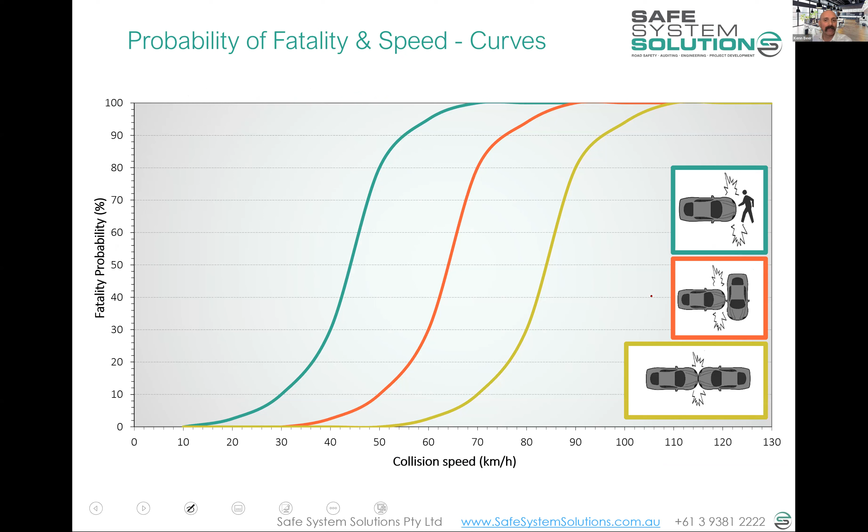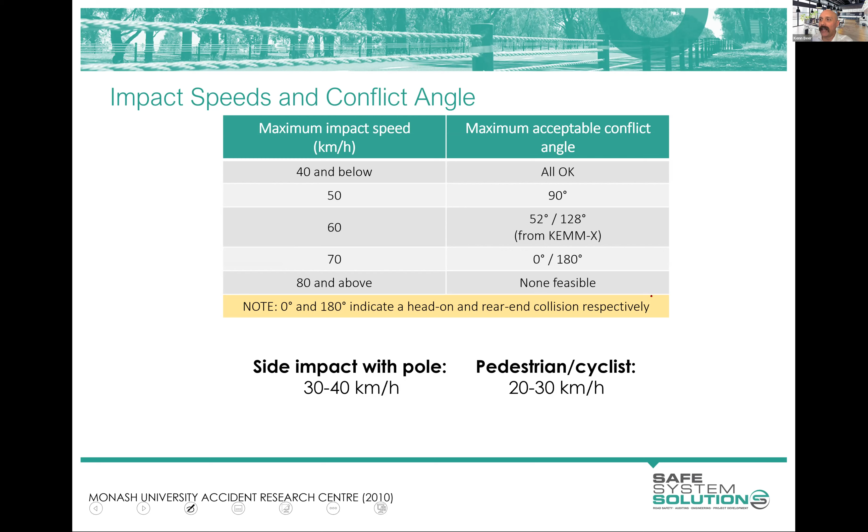In terms of severity, people generally understand speed, angle, vulnerability, and those sorts of things being the big factors. We delved into a bit of the science behind that with some graphs and different crash types, analyzing different speeds and angles, different crash types, and different road users involved.

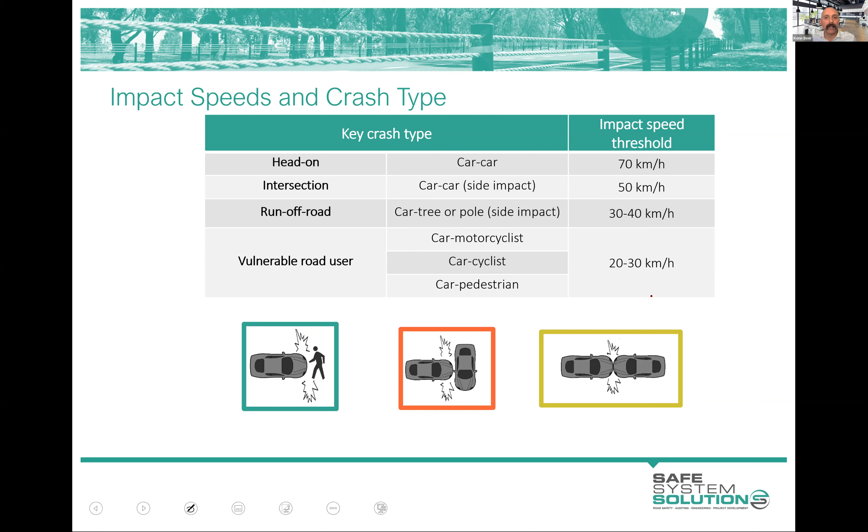We got all of that to the point where we provided that colored chart, and we'll be using the colored chart - I don't have a slide of it here, I've got one later on that we'll look to. But these are the building blocks you're going to need, plus a whole lot of your existing knowledge, whether you're a road safety auditor, involved in traffic engineering or road design, or a bit more on the periphery - you'll be utilizing existing knowledge to supplement your ability to do these assessments.

All right, but how do we do these assessments is the question. And I thought we might chuck up a poll, Kathy - it's not one to answer, but this is for me to just gauge where people are at in this course. So I don't know if there's polls there... oh, it is there, here we go. It's popped up: what has been your involvement with safe system assessments?

Nothing, safe system what now? I've heard the term but don't know much more. I've had one done on one of my projects. Done one. I live, breathe, and eat safe system assessments. So let's see where we're at as a group.

Okay, let's display that.

Most people here heard the term and not really much more. A few had them done on projects, so that's good - that's an indication of their mounting presence across Australia and New Zealand. A couple of people done them, been part of teams doing them, or living, breathing and eating safe system assessments. I love it, and a couple down the other end, a sort of skewed bell curve there. Beautiful, okay, that's good.

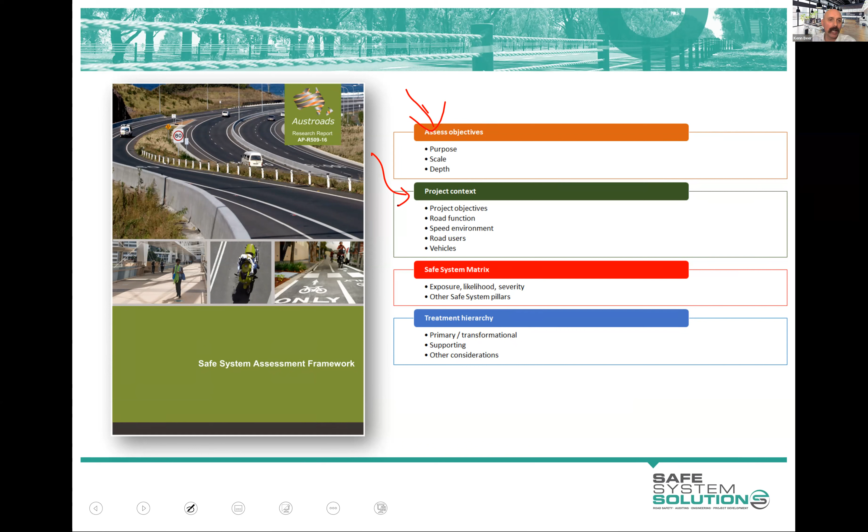Then we go into the project context and understanding what are the project objectives, what's the function of the road, the movement and place categorization, the speed environment, different road users, vehicles, all of that sort of stuff. Gathering that context helps us do the assessment, but also helps us make meaningful suggestions to the project team for improved alignment with safe system principles that understands why the project's happening, the objectives and the like.

Then we've got the matrix. This is the central part of most safe system assessments, and it deals with the exposure, the likelihood and the severity. And also we look at the other elements or pillars of the safe system, being the road users, the vehicles, and the post-crash care.

Then we make some suggestions - here's how you could improve your project in terms of alignment with safe system principles. And we start to categorize those into, are they going to be really big improvements in alignment with safe system principles, or is it more just helping out a little bit? I'm going to go through that shortly.

But what happened is around 2016, this was released. And before that, myself, a colleague, and a guy in Western Australia were really the only people doing these - what we were calling safe system audits at the time - trying to fill that gap. Now, ours was slightly different, but a lot of that was taken into this document.

This was pretty good, but really there were only a handful of these assessments done when this document was produced. So what happened was it went out there, and then people started using it more and more, doing these assessments, and lots of things were discovered that were not answered in this document - nobody had foreseen people coming up with these things to try and decide. One or two things were found to be not right, or not the best way to do it, in this document.

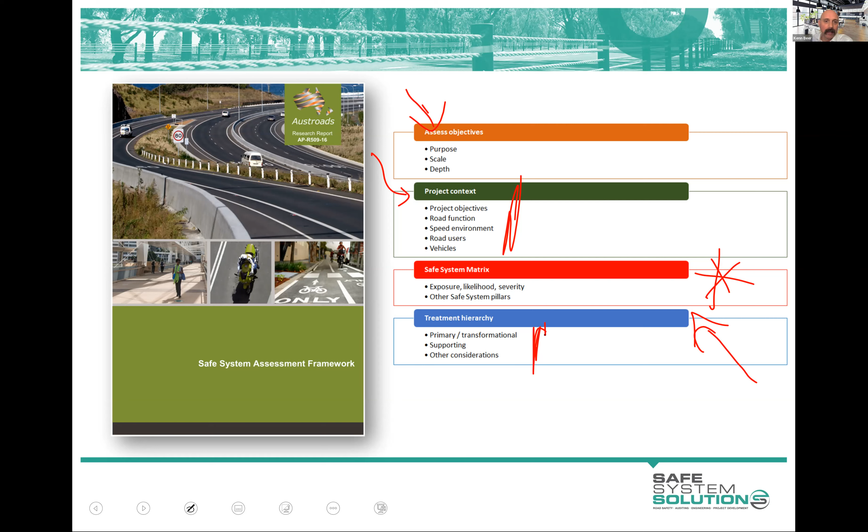But anyway, a couple of jurisdictions, Victoria and South Australia, produced their own guidelines which fill in gaps of things that were missing and clarify a few things and correct one or two things. Those are available publicly, and you'll find when you get past the front cover, these documents are the same - apart from a global replace of VicRoads with DPTI at the time, that's pretty much the difference. And that's fine, because we're seeing consistency across a few jurisdictions.

And what we're seeing now is that across industry, all across Australia and New Zealand, pretty much everybody is falling into line, utilising the Austroads guidance, and we've provided a few supplementary fact sheets for gaps that were still there even after these documents. This whole process is evolving and getting better, with people gaining a better understanding of it.

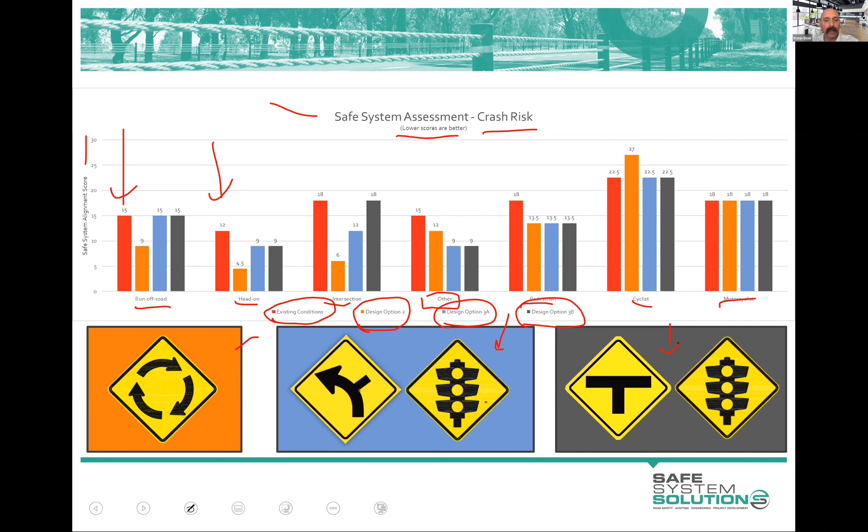We've got to ask, what is the context of this project? So you've been asked to do a safe system assessment. Maybe they've come to you and said, can you form a team of assessors and do the safe system assessment for our proposed upgrades to this intersection?

And you say, yep, sure, happy to help. We're going to need to understand a bit about your project and the context. And Austroads has provided these prompt questions in the Safe System Assessment Framework document. So you can use these. You could add more questions if you've got more that you want to build further context, but these are a pretty good starting point. What's the reason for the project?

And what are you trying to address here? Congestion easing, safety issues, speed compliance, freight efficiency. Why is this project happening? What's the function of the road, existing and in the future? Have you done a movement and place assessment? What's the movement and place categorization? All of this different thinking.

What's the flow of traffic, pedestrians? What's the current speed environment? What's the future speed environment? Have things recently changed? You're starting to think then, how well do these align with different safe system threshold speeds?

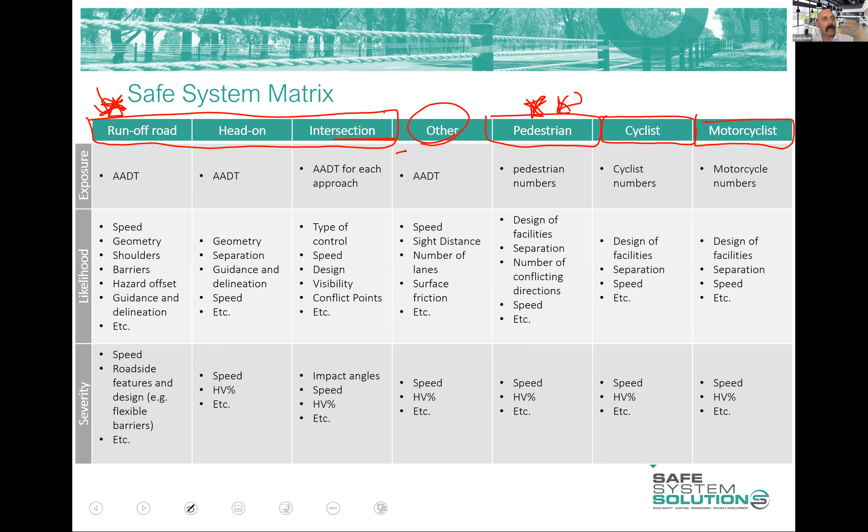So if you're worried about back of queue crashes or people doing a sudden stop at an intersection and rear ends in that sense, that actually has been decided to be categorized as an intersection crash. However, if the rear end is associated with a mid-block crossing point, school crossing, or pedestrian operated signals mid-block, or people emerging from driveways or these sorts of things, then you'd categorize it within the other category and you would make a little commentary around that there.

So those are the crash types.

And so then what you do is you look at these different rows, and what have we got? Severity, likelihood, and exposure. Okay, we're all very comfortable with that, and that's good. That's why we spent time on it. Let's make sure we understand this.

Okay, so exposure, you'll see here, these dot points are just some thought generators. AADT, AADT, and AADT for each approach. AADT being annual average daily traffic, the amount of cars and trucks going through this road section.

AADT has been put there for other, but it might be number of scooters. I suppose you could call that an AADT where the T, traffic, in that case would be scooters. But for pedestrian, we see pedestrian numbers, cyclist numbers, and motorcyclist numbers for motorcyclists, of course.

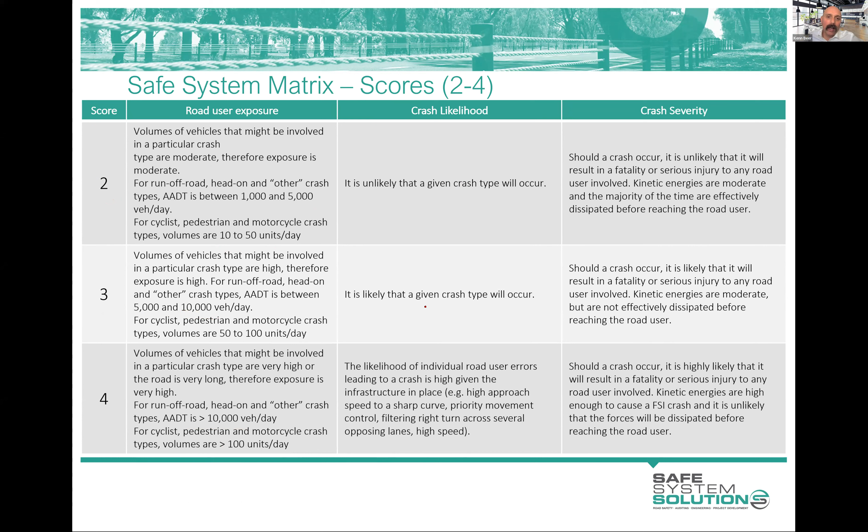If we go down to a 0, there is only minimal chance that a given crash type can occur for individual road user given the infrastructure in place, and the extreme behavior or substantial vehicle failure could lead to a crash. So this one, the whole likelihood scoring is subjective, and it relies on your understanding of what increases the likelihood of crashes.

Road safety auditors tend to be exceptional at this scoring category and really have good understanding, and those who have done lots of crash reduction studies or crash investigation studies or black spot studies really understand a few of those key characteristics. But the important thing to remember is this is a relative score, because if we took this as an absolute, we'd say highly unlikely across everything, because crashes are, in the scheme of things, highly unlikely. But we're talking about that relative to the other existing intersections or areas around your state or the like.

And we know that the 4 is really held for things we know have significant deficiencies, or are requiring high cognitive workload for the road users, or have really significant constraints in terms of sight lines, or really complex decision-making points and those sorts of things.

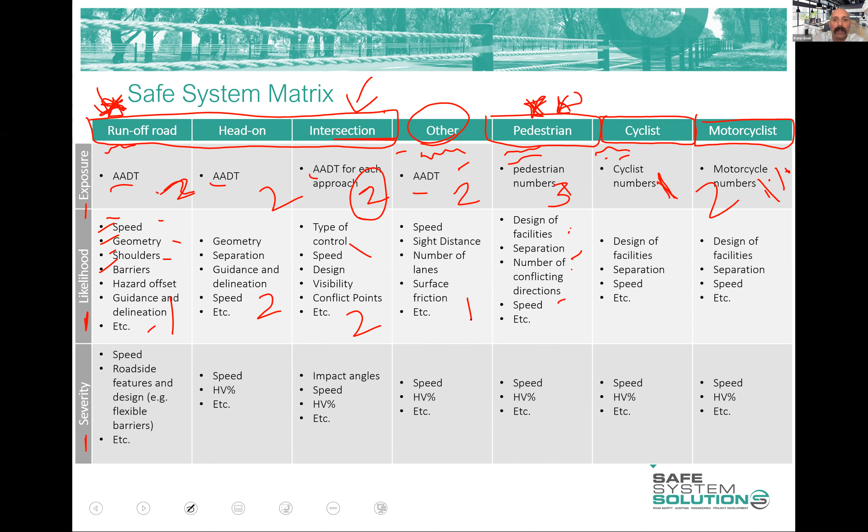So this may be, well, we'll put a 3 for pedestrians. So maybe it's got really good sight lines. It's got a pedestrian refuge. It's got good lighting at a point. It's well positioned on pedestrian desire line. Everything's looking good. You're really happy with it all. And you're happy to say, well, actually, I think, I'm only going to put 2 here.

And cyclists, you might say, well, there's no cycling facilities, there's no cycle lane, there's no alternate paths, in any area. Maybe part of the reason why our volumes are low, but forget about that because we've accounted for volume. And you're just going to say, well, actually, I'm going to say a 4 there because it's really, there's nothing, and it's inherently got issues if cyclists use it.

And then motorcyclists, well, you look through and you're thinking about motorcyclists at intersection, and they're smaller, so they're hidden, they're inherently unstable. Those are likelihood sort of factors you're putting in there, but you're not thinking about their vulnerability because that'll come in the severity, but it's just what's the chance that they're going to crash, and maybe you go a 3 for that in there. Okay.

Now, I'm going through this very quickly, obviously, and just sort of high level broad brushing it. You're going to actually need to do some justification in each of these when you get to that cell in the matrix. How did you arrive at that score?

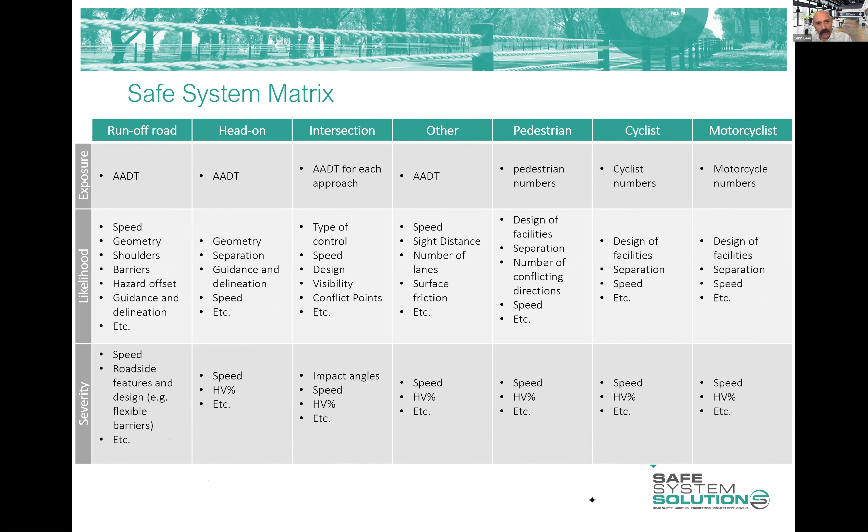Now I'm going to pause there, Kathy. I'm going to see if we've got any questions, and I'll talk to that a little bit, and then I'll do a worked example and show you some actual ones. Well, actually, after some questions, we'll probably take our stretch break and fill up our waters. Any questions at this stage, Kathy?

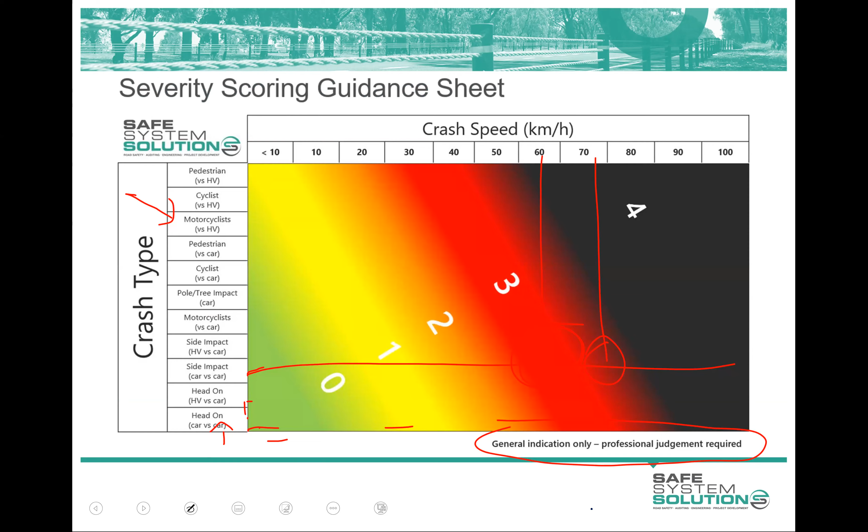No questions just yet, just corrections on your calculations. Oh, what did I stuff up? Just doing it quickly - 2 times 3 times 3 equals 18. Sorry, yep, good, well done. Prize to that person who can calculate better than me running through quick. Well done. Oh, there you go, easy fix.

Any other questions at this stage? I guess we're looking for questions on all of that. Or we might give everyone 5 minutes to have a stretch break and so on, and maybe think of some questions and type them in the meantime.

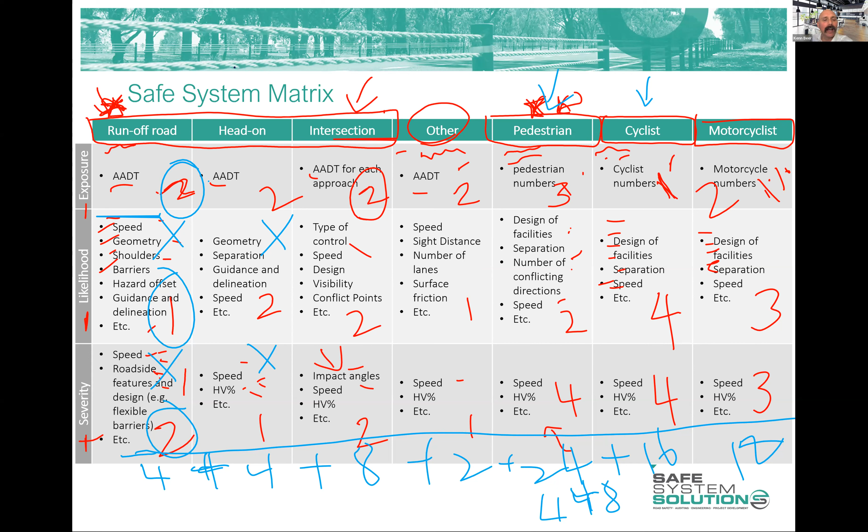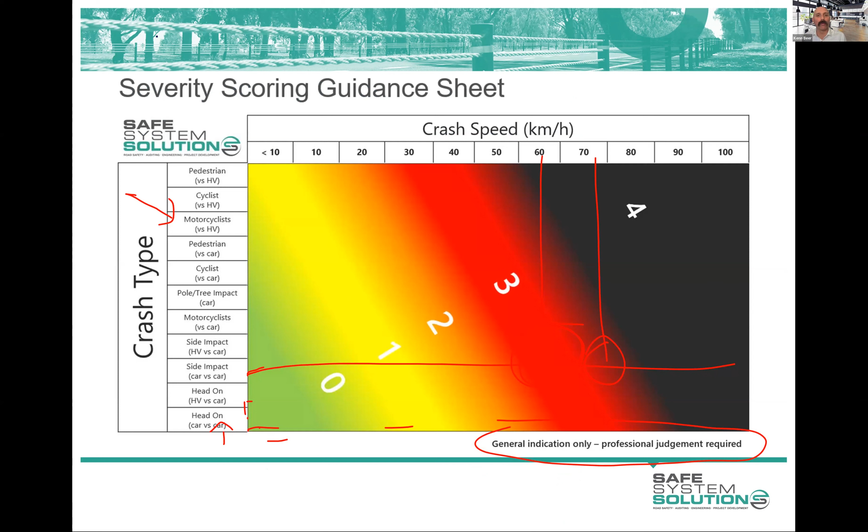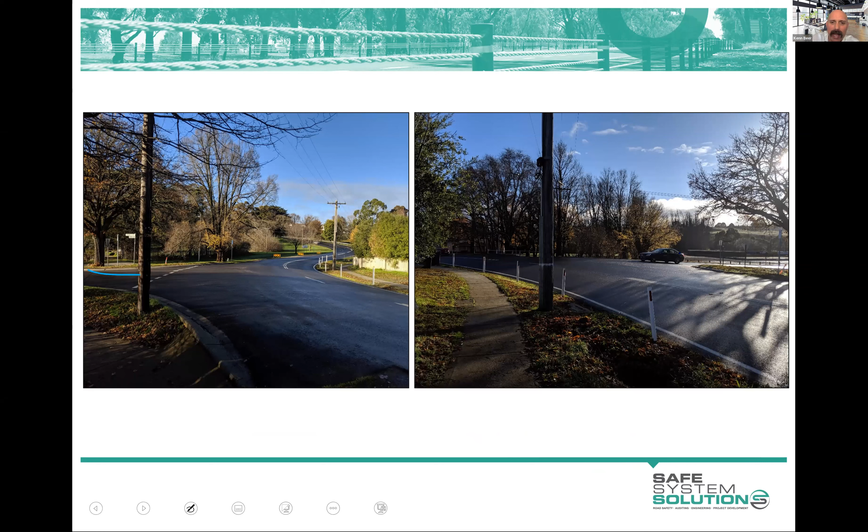Okay, so let's take another one and see it fleshed out a little bit more. Say we've got this intersection, for example, and you can see it's a priority controlled intersection, a give way intersection. You can see a vehicle coming out, got a bit of footpath, some guideposts, power poles, one lane in each direction, an approach to a town. But they're saying we want to upgrade this intersection, we've got some concerns about it, and the area is growing, so we've come up with 3 design options for this intersection upgrade.

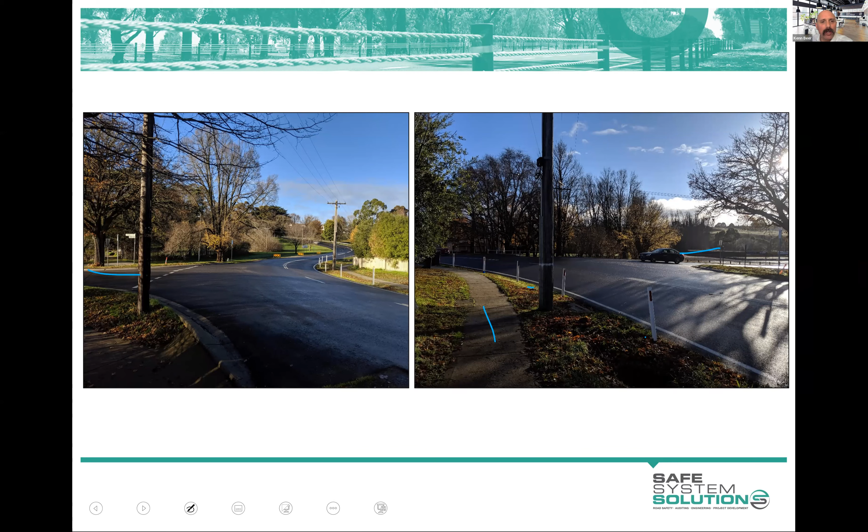Here's our first design option - one of the options could be a roundabout here, a single lane roundabout. The next option we've got is a signalized intersection - I'm going to signalize it and keep that curve there, we'll call it a modified T signalized intersection. Then our third option would be a conventional T intersection with some slip lanes.

So there are 3 options. What you do when you're handed all of this package - there's our 3 designs, that's the area, you've got some context and some information from them - is you go out and look at the existing conditions, gather your intel around that, and then fill out one of these matrices.

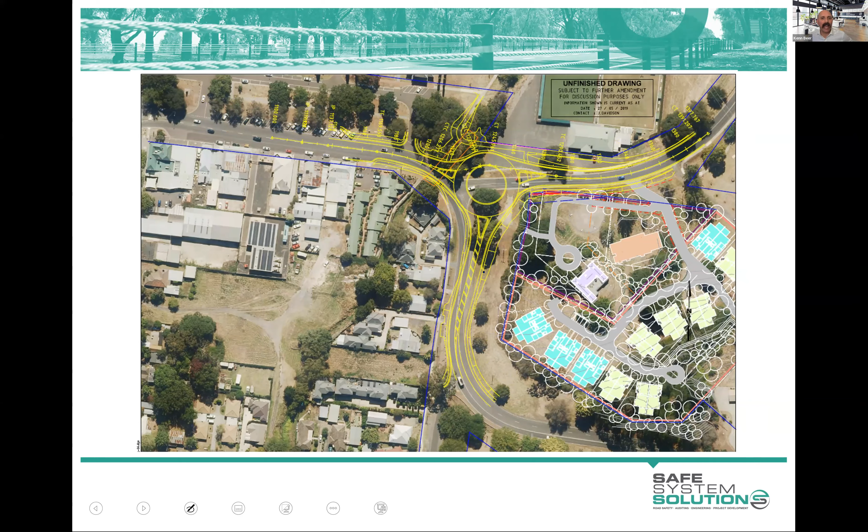And you do it for the existing condition. Okay, so what is there now? Put the designs away to the side. What are the existing conditions? How many vehicles are we talking about? What's the AADT on these roads? What's the intersection AADT?

Other pedestrian—don't worry if you can't read the words in this, I'm just using it as a demonstration. And then you pop your scores in there.

You'll see then when you go to do likelihood, you're putting there factors that increase the likelihood of crashes, and you dot point some of those out. Factors that decrease the likelihood, dot point a few of them out.

And then you put a score there. Now interestingly, that score has a 0.5. Now, 0.5 is discouraged, but it is acceptable under the different guidelines that we have.

Austroads made no commentary around the precision of the scoring, so they didn't make any comments really at all. As a result, people started to put some pretty precise numbers to this, and we saw people putting a likelihood of 2.73, something like that. Then you multiply that out and you get a number to 12 decimal places or something when you multiply it out. Given that we know this has got some subjectivity to it, it's really just a risk assessment methodology. That was kind of crazy.

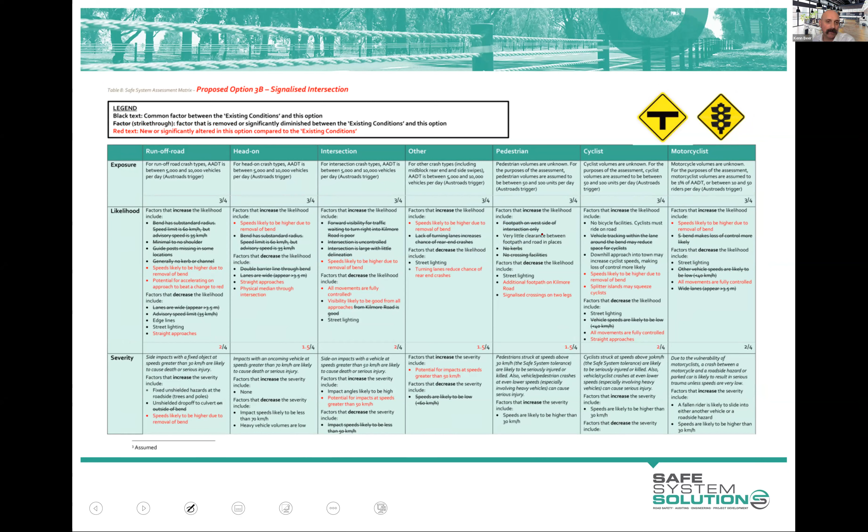What that does is give you an existing conditions matrix for each of the design options. You're then able to produce these overarching scores which say your baseline was 118.5. If you build the roundabout as designed, that brings it down to 90. If you do the modified signalized T intersection, 99. The T intersection, 105. What I see from that is any of your proposals improve alignment with safe system principles. The roundabout as it stands gives you the best alignment, but none of them are zero.

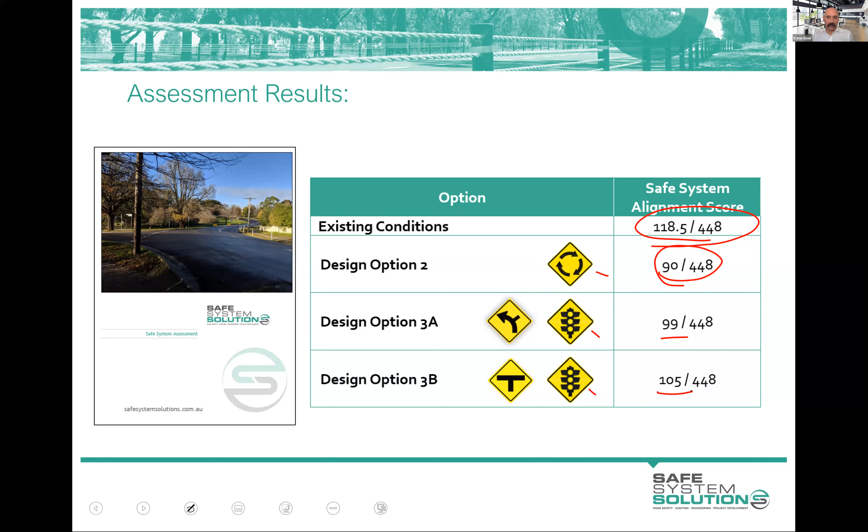So we can continue to work on these to discover what else we can do that's practical and achievable. You can get this next level of refinement, which we already saw, but it helps us drill into where we can do things.

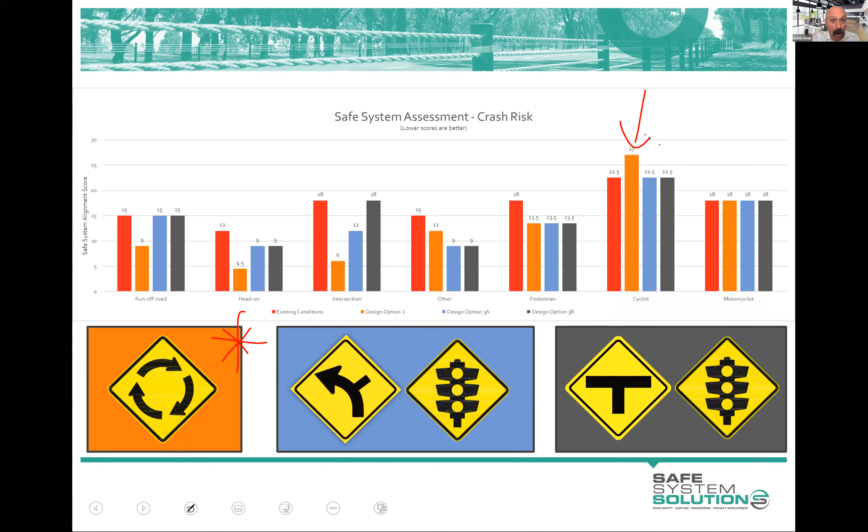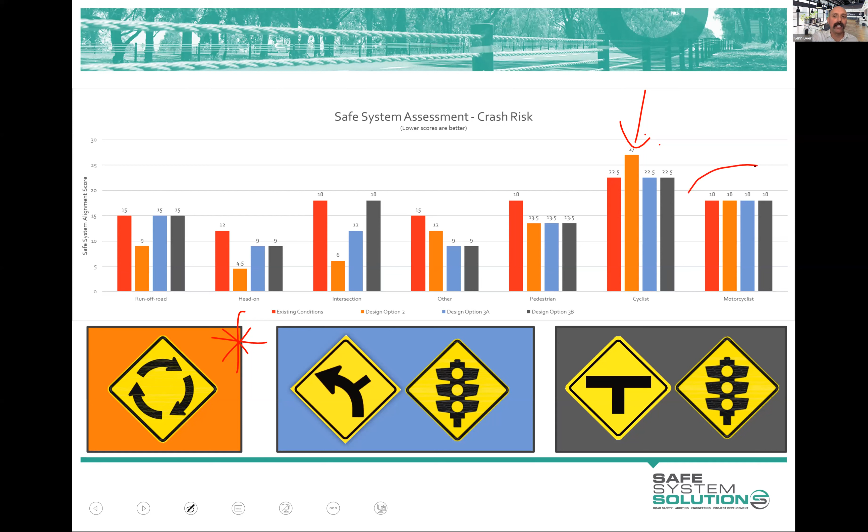So you make some recommendations. You might say, hey, the roundabout, while it came out on top, was actually not great for cyclists, who are coming out as the worst thing overall in alignment as an individual crash type. So we recommend you provide cyclist facilities on the outside, here's some ideas on how it could look. You might say motorcyclists are consistently scoring badly across the board - could you use motorcycle friendly signage, or other things?

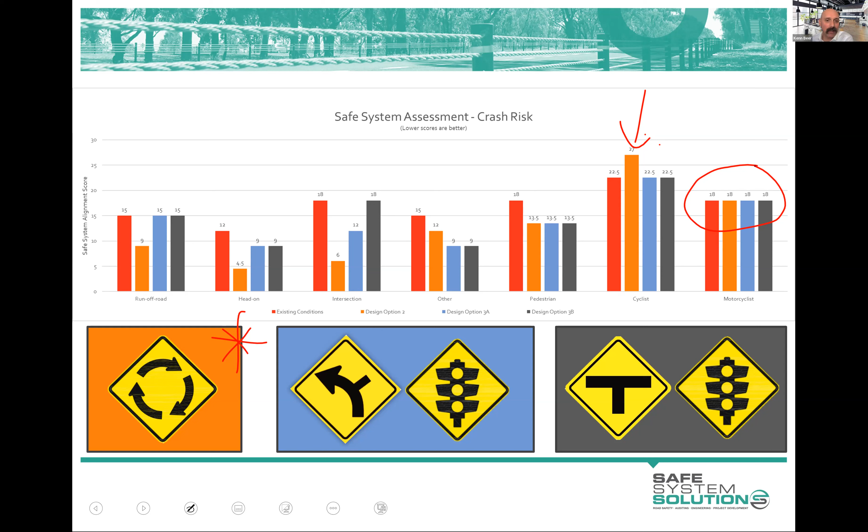So you're then able to make these suggestions to the project team. A safe system assessor has no regulatory power and can't demand changes - you're just providing advice, here's how you could improve those scores if you want to go down that path. And there's one little extra trick around the suggestions you make.

So you're saying, hey, if you're going to do that roundabout, here's some suggestions - let's do a separated bike facility around there. And we're going to say that that is a primary treatment, because we're categorizing it - is it primary or is it supporting?

Primary treatments are any road planning, design or management considerations that virtually eliminate the potential for fatal or serious injuries occurring in association with foreseeable crash types. So you're thinking about a particular crash type, and are we virtually eliminating the chance that it will result in death or serious injury? So not necessarily eliminating that crash type, but the chance it results in death or serious injury.

Supporting treatments are road planning design considerations that improve the overall level of safety associated with foreseeable crash types. So it does need to improve safety, but it's not expected to virtually eliminate the potential for fatal or serious injury for that crash type. A little note - it doesn't change the ability for a primary treatment to go in the future. Non-safe system is probably there just for terminology purposes - we don't tend to put things in that category because you're not making recommendations for non-safe system aligned treatments.

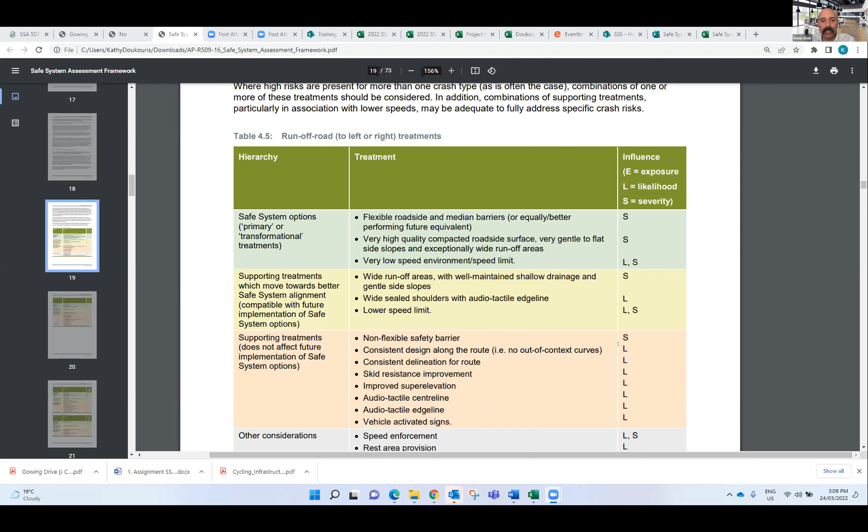So those are supporting treatments. We're seeing wide run-off areas, non-flexible barriers, so more rigid barrier systems, audio tactile and the like. We know these are going to reduce risk, but they're not going to virtually eliminate those crashes.

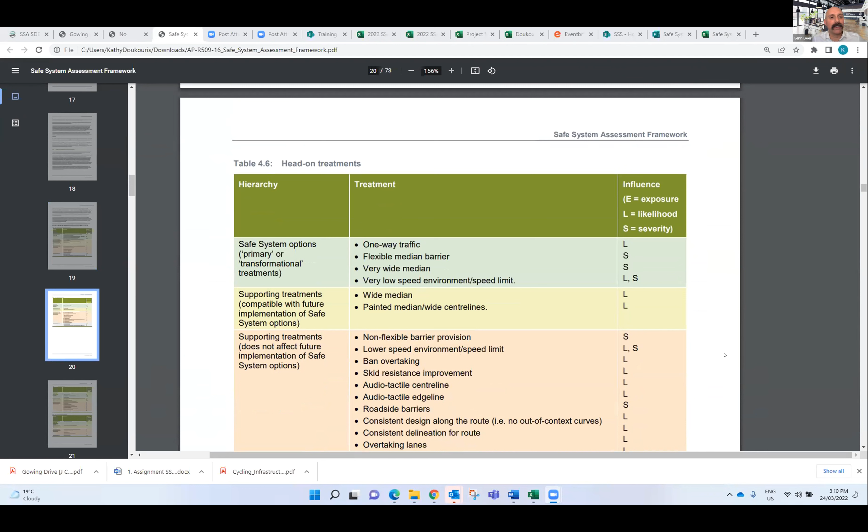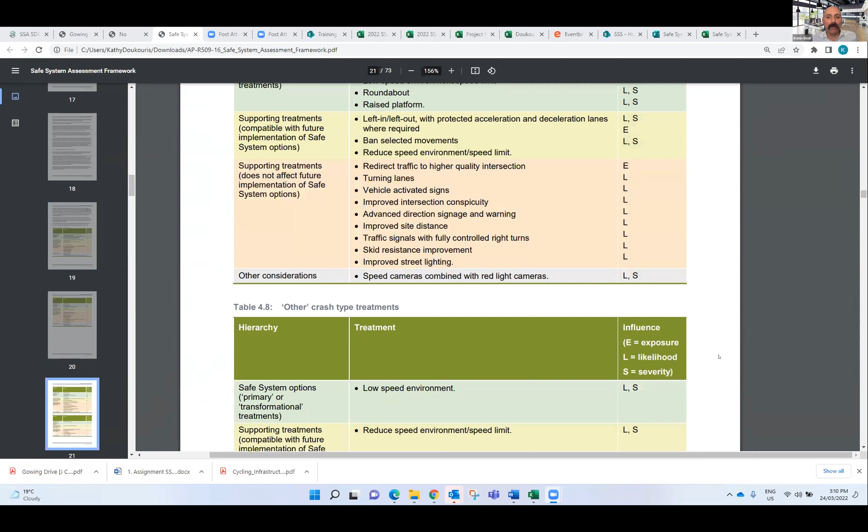And if you scroll down a bit into the next table, we see head-on treatments, and you see again lists of primary and supporting. You go down a bit more and we'll see the intersections pop out. So these are not all treatments possible. You'll come up with other things. You've got to make a judgment call based on the principles, but this is going to help and guide you, so you might want to be referring back to that as you think about it.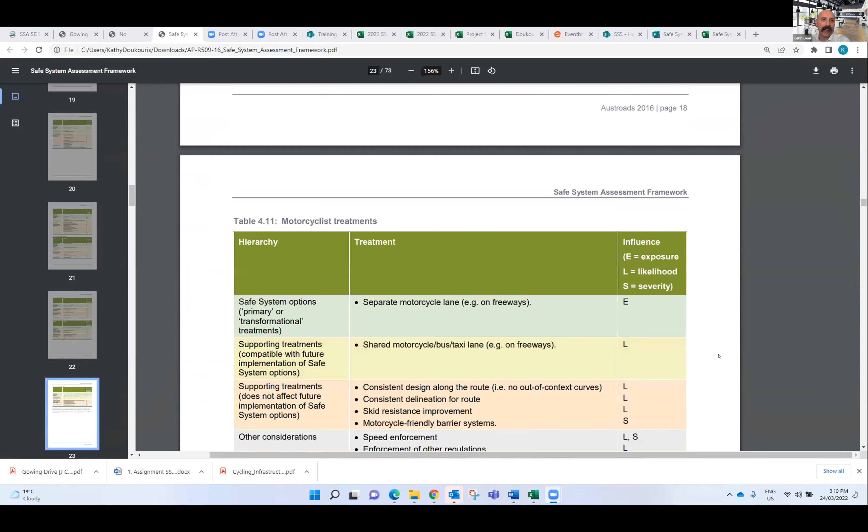Okay, thank you, Kathy.

So let's go back to my slides. So what you're going to do is look at the design that we give you, score the existing conditions of the area without that design built in your mind, and then you're going to imagine it built, and then score that. Then you're going to say, for this design, here are some improvements, and you're going to categorize every one of those suggested improvements into primary or supporting.

And we'll take you through a template to show you this that you'll be using. Any questions before I jump into this, Kathy?

Yeah, we have heard some comments come through. Has a high original score ever justified revisiting the business case?

High original score, so as in a high score in the design. Examples of where it has certainly made people revisit business cases and fundamentally change things is some of the ripping out of roundabouts and replacing with traffic signals, where the total score went up. So it was a case of putting that on top and reminding them that at a statewide and national perspective, we have committed to the implementation of the Safe System. What you're about to build goes the other way, and here are the scores to prove it. Yes, that certainly gets revisited and altered and changed and back to the start. Now the whole business case might have, in traditional senses, looked pretty good - increased efficiency, did this and that - but this has been helpful from that perspective.

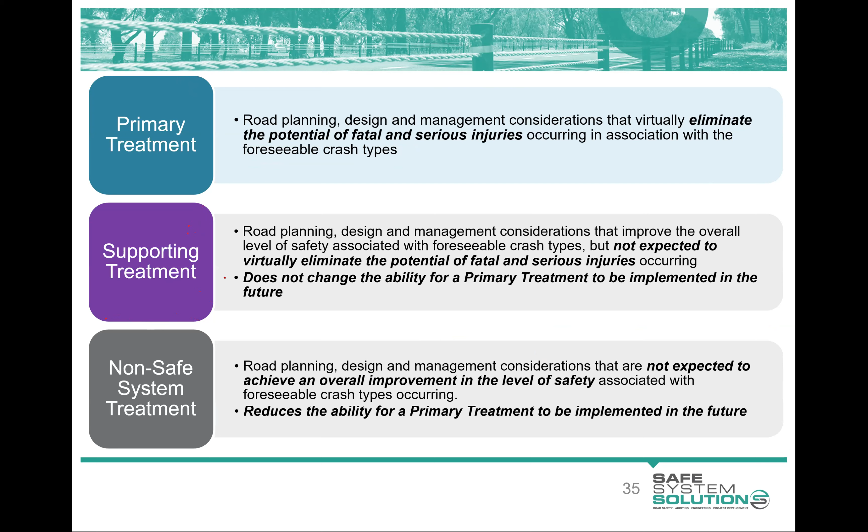That's all the questions for now. Okay, so we've done the matrices and we've got that good score, but there are these other questions that are asked in a full Safe System assessment, and they are qualitative.

They are not quantitative. We don't put numbers to these, we just put written answers. And this occurs in full safe system assessments. They're these questions to sort of prompt your thinking around other wider safe system elements. They may influence your scoring, or they may just bring up other ideas completely. But the questions are straight out of Austroads, and you've got to go through and write little bits and pieces and notes around these. So they're categorized into road user, vehicle, and post-crash care.

The first one there is, are road users likely to be alert and compliant, and are there factors that might influence this? And then next one, what are the expected compliance and enforcement levels of alcohol, drugs, road rules, driving hours, speed?

So you're starting to look at what are the users around here, and you might be looking at different communities because it's a remote community, or you might be looking at just the general run-of-the-mill sort of Brisbane area or Sydney area or something like that. So you might go, well, it's not that different to anywhere else, so I can't really make any meaningful commentary around this, but that's all right. At least you're thinking about it.

What's the likelihood of driver fatigue? Are we out in the middle of nowhere and higher chance of fatigue? Can enforcement be conducted safely?

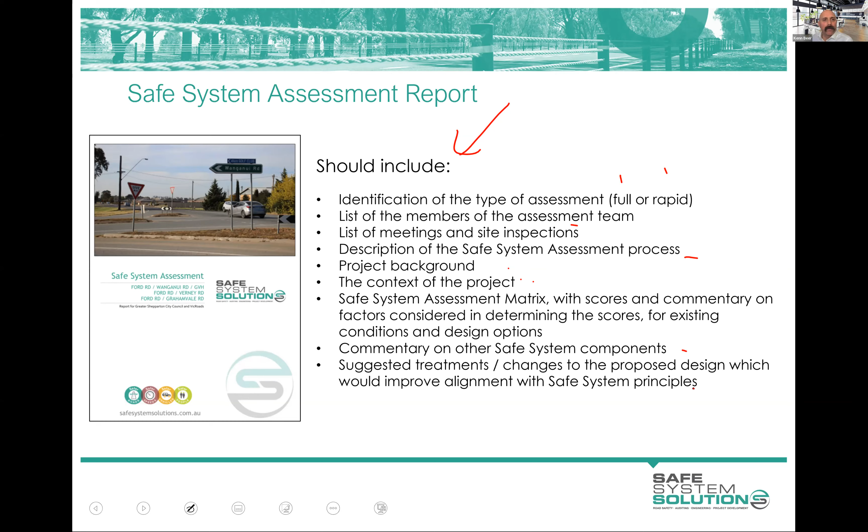So yep, we can run through the assignment. I'll start by running through a bit of it, then get Kathy to bring up some stuff on Moodle in a couple of minutes. What we're going to do is allocate you an upgrade design of an intersection. Some of you have already looked at it to check that it's close enough to your home or office or wherever you want it to be, but you're going to get given that. We're going to give you a template, which we've slightly modified in the sense that we've highlighted areas and crossed areas out.

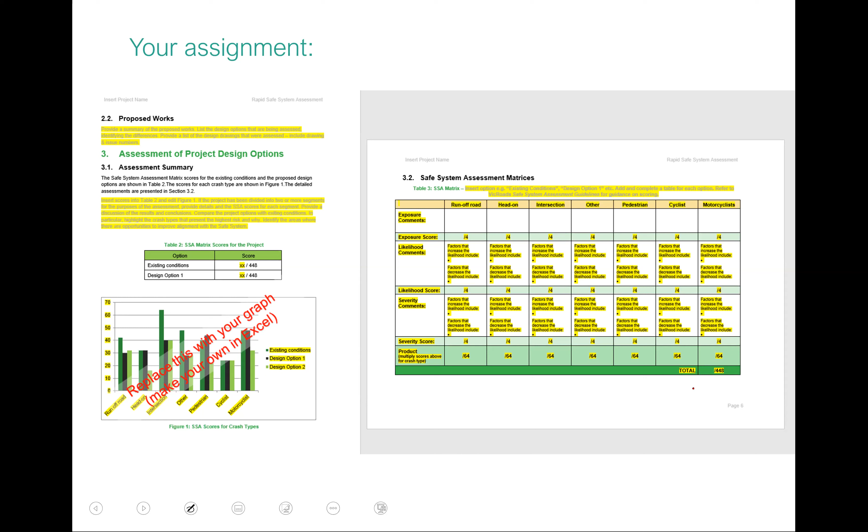Just like your assignment for module 2, if it's highlighted yellow, you've got to do something, okay? You'll see when Kathy brings it up shortly, we want some info on proposed works, and you're going to get the matrix, and you're going to have to fill out the matrix and put scores in and the like. So anything yellow highlighted is what you'll be working on based on your site.

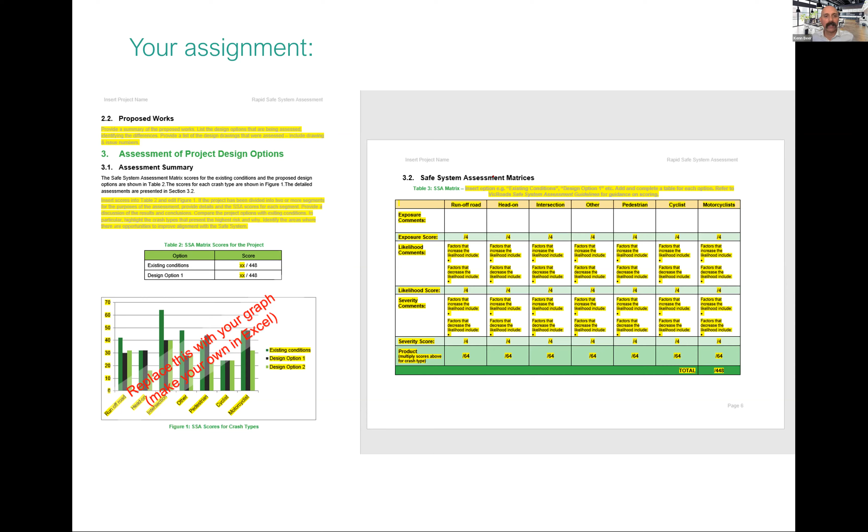We'll show you that in a second. But before we do that, you are going to be asked to go out to this site. So I just want to give you a brief safety briefing for the site.

Now, I should say that we've risk assessed all the sites, ensure that they can be done extremely safely. There's areas parked safely away from any danger. There's areas for you to be able to stand and observe that are not on the road, and just normal sort of pedestrianized areas and the like.

So we've done a level of ensuring that these are low risk, but we ask that you are out there wearing a high-vis vest. We don't need you to go out there and measure lane widths and put your head down to look at the crossfall and anything like that, all right?

You're just getting a general feel for how it operates. You're thinking about those different crash types, how they might occur. You're looking at a design and you're imagining that design built in this area. How does it tie in with the existing? How are things going to alter? How are people going to use this new design?

We don't want you to be a hazard to others. So we don't want you making people walk on the road to get around you, or parking in that spot that forces cyclists out into high-speed traffic and the like.

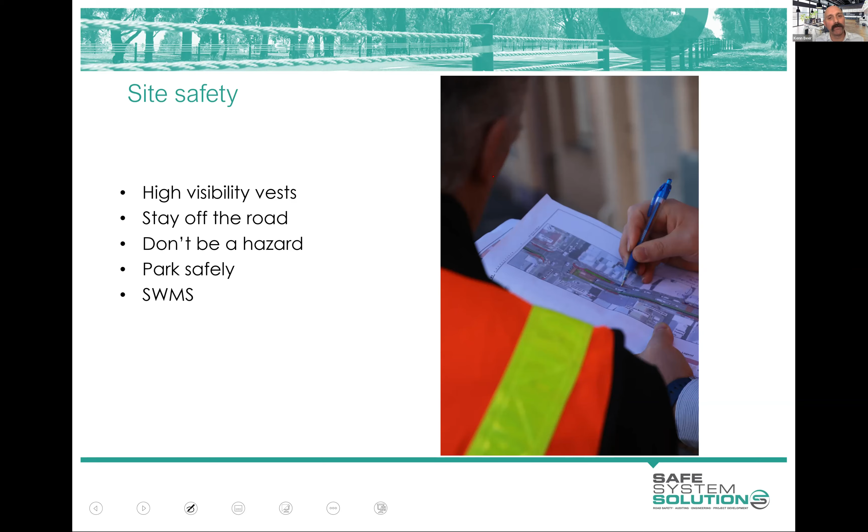And what we've done is we've created a safe work method statement for this activity, which says some pretty common sense stuff. Kathy's just now showing you there that the safe work method statement is zoomed in a bit, okay, is the PDF there.

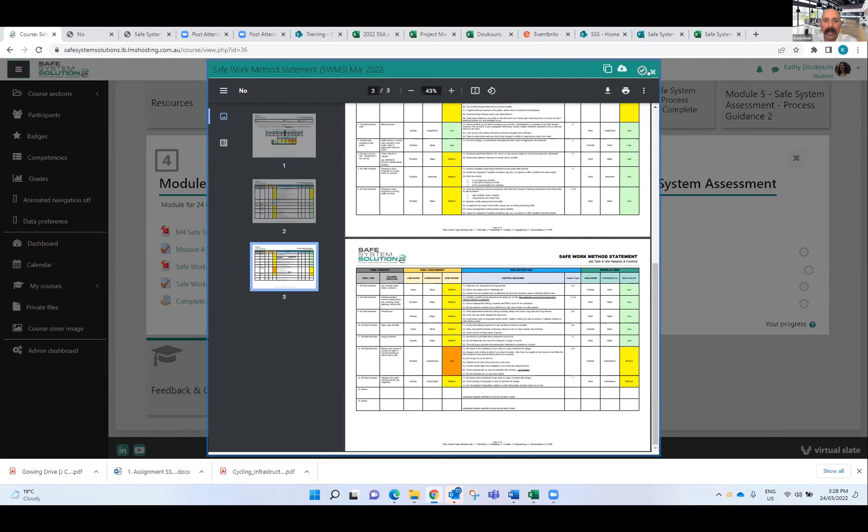And that one is there to just show that we've had to think about all of these things, and you're going to act appropriately. Things like relies on you not going out there when you're intoxicated, and pretty simple stuff. Things in there which aren't probably going to be that relevant, but if you did have to drive for a bit of time, that you're thinking about fatigue and those sort of things.

So I think it'll be pretty standard for everybody, and you can have a look through that, and then we just ask you to take the quiz as such, which just basically says that you've read that and you're going to act appropriately, and you understand that we've assessed the risk, but you've got a responsibility as well. Okay, so that's the safety aspect, site safety aspect of it.

And you will download that, make sure it's reasonably close to you, in the sense that we don't want you traveling a few hours to get to your site. It should be pretty close to whatever address you gave us.

Then you're going to download the Word document. And the Word document is, as mentioned, the Victorian template. And of course, you can rebrand it if you wanted, but for the purpose of this, you can just leave it as it is. But anything highlighted, you're going to change.

You're going to be required to do something. But we don't want an executive summary. That's going to waste your time, and I'm not going to read it anyway. So we don't want table of contents. Don't want any of that figure stuff.

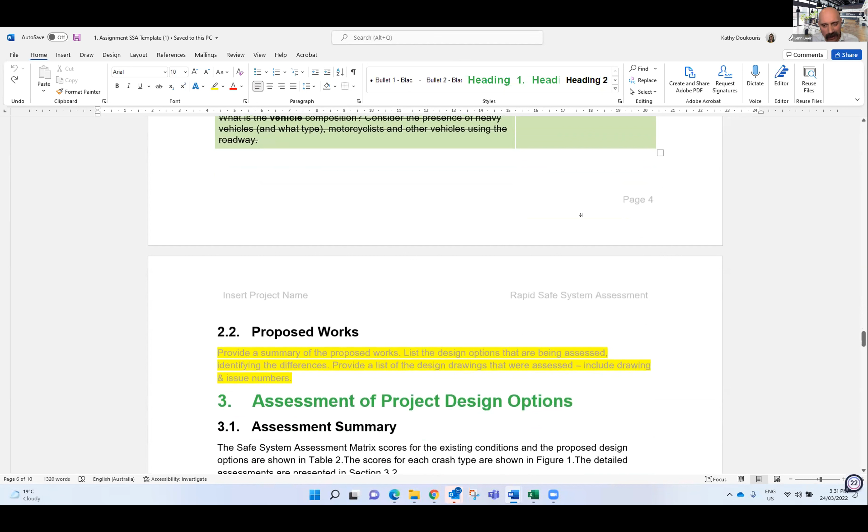Okay, so I don't want to see two reports that are identical with only one person's name changed. We don't want any of this generic background that doesn't give context. That's just to try to make this as streamlined and quick as possible, so we're confident you understand this process.

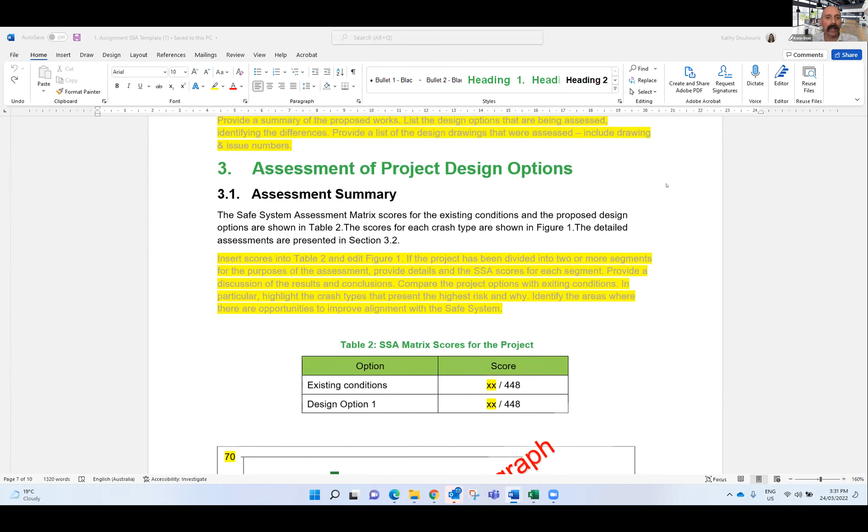But we do want you to put a little bit of info on the proposed works. Probably the easiest way would be a snip of the design and then a sentence or two about what's being proposed. Not pages, please don't write pages and pages of text, wasting your time. I'll just have a skim of that because that's not really what I'm looking for. I'm looking for the next bits.

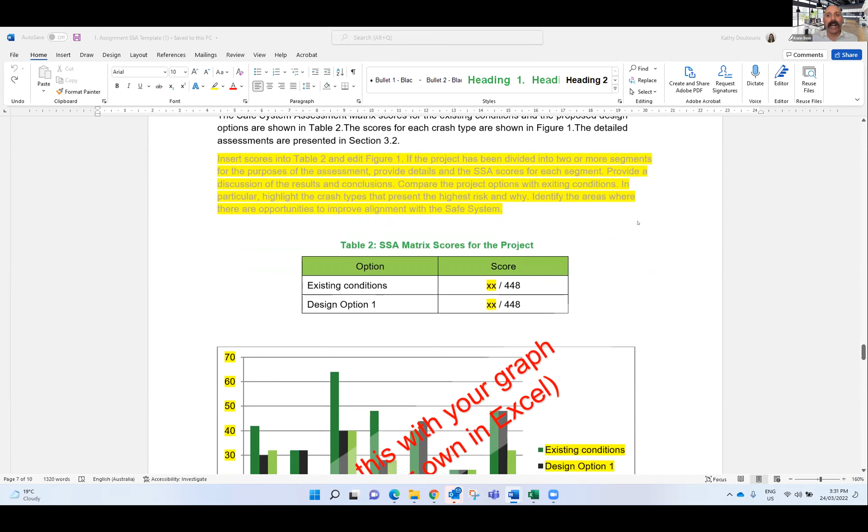So an assessment summary, which is done after you've done your assessment, where you summarize the outputs. And the graph - we're going to ask you to produce a graph of the scores that you produce in the matrix.

To make your life a little easier, we've created a graph generator spreadsheet tool. Most of you could have created this yourself in 2 minutes, but just to make life easy, once you're going through your matrix and get your scores, you put numbers in there for exposure, likelihood, and severity, hit return, and your graph starts to produce itself. You'll only have one design option, so you'll have a graph with 2 bars under each category: existing conditions and design. But feel free to use this whenever you want.

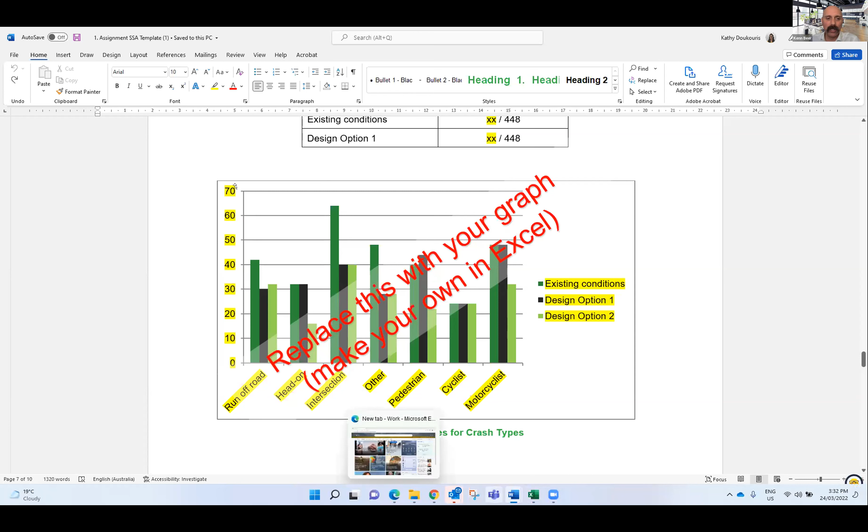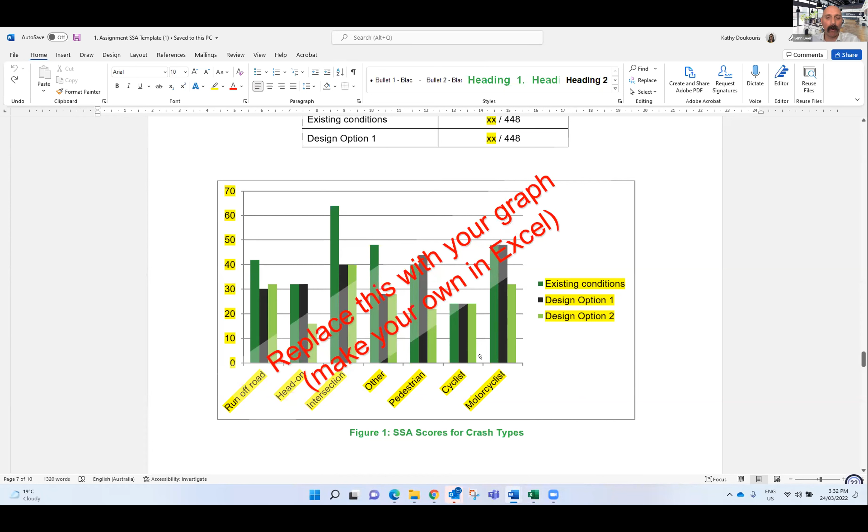Then you're going to copy the graph, or use your snipping tool to snip it, and put it in there - we're going to be looking for that. If we see assessments come in without the graph, that's significant points off, because that's such an important output that people are looking for.

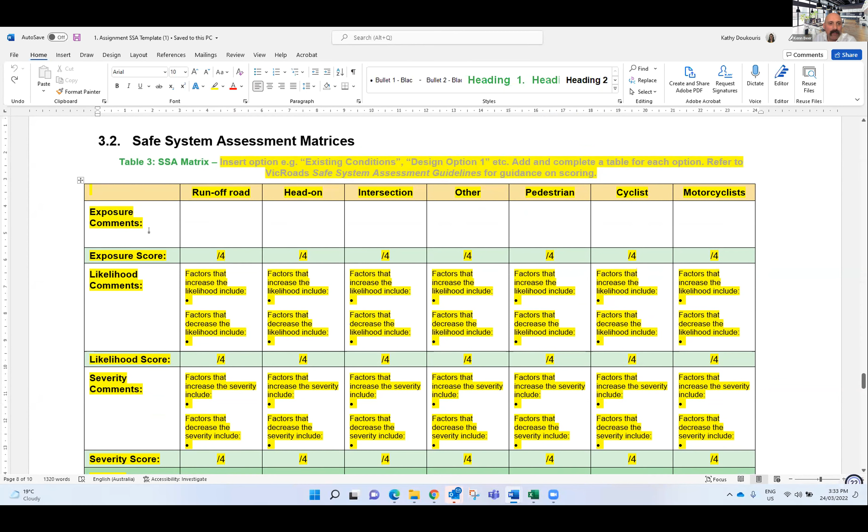So really, the first thing you're going to have to do, and what you'll spend the bulk of your time on, are these 2 matrices. The one that's there is the existing conditions. You'll fill out information in the exposure comments, put the score in the likelihood comments, and dot point the factors that make you want that score higher or lower. Then you put your score for each of those, your severity scores, justification on the severity, and then you multiply those through - that gives the product score, and you add them up to get the total score.

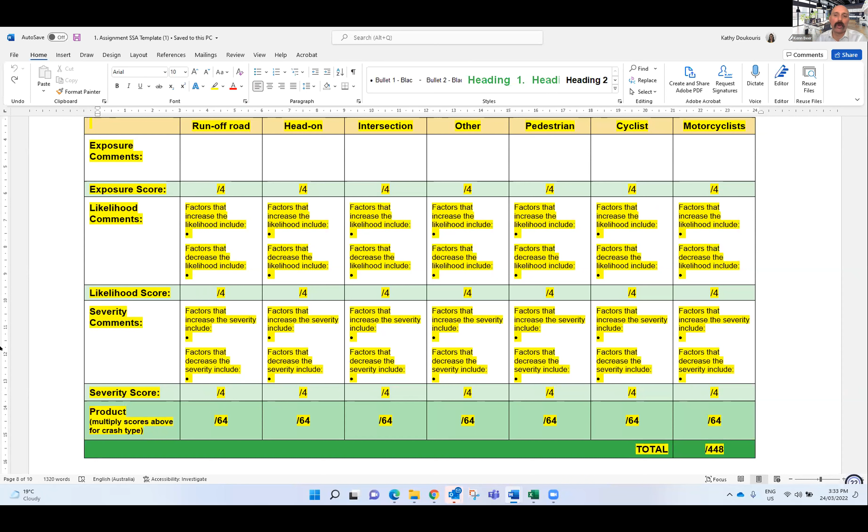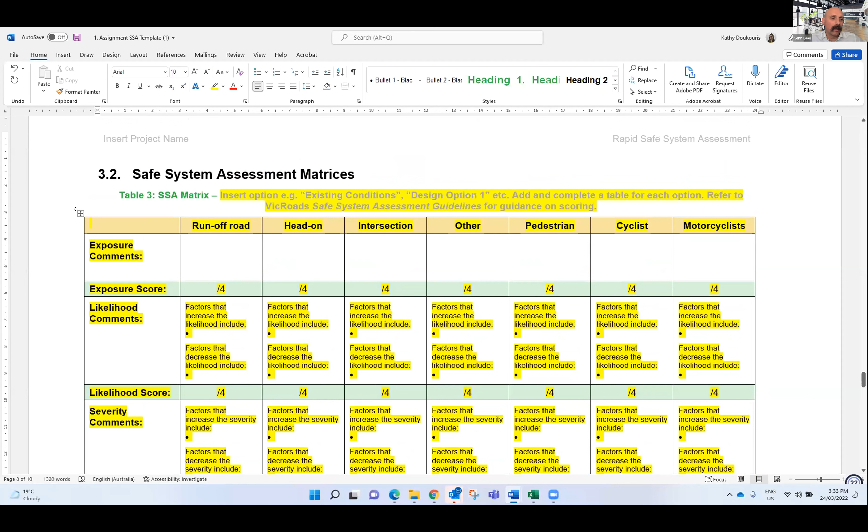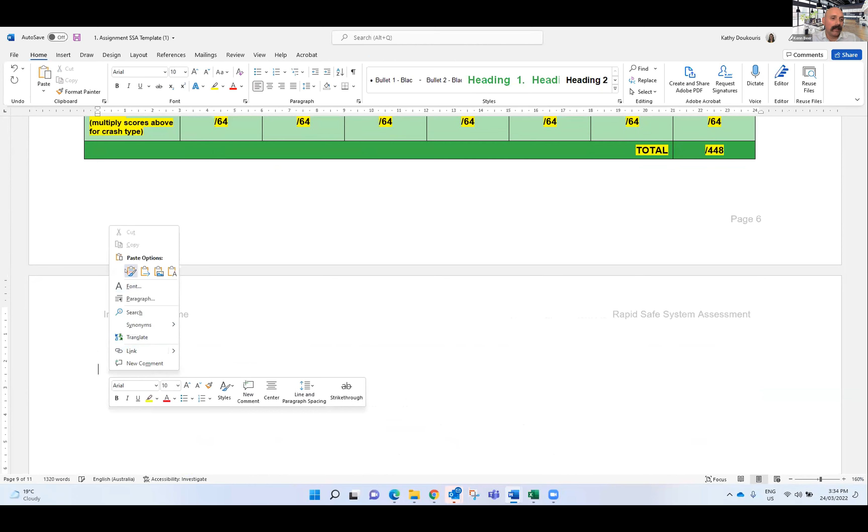So you've got that nicely finalized for your existing conditions. You copy the whole table, copy, and then paste, and title that one Design Option 1.

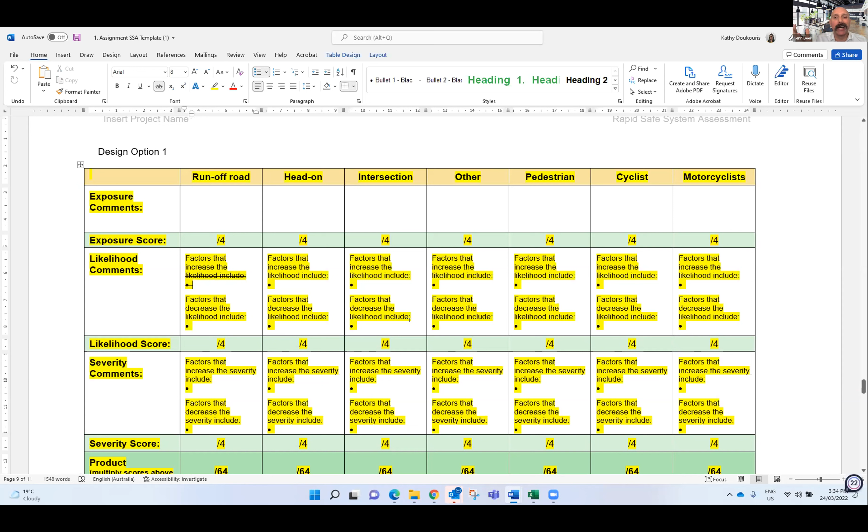Then you modify it - strike through any things you want to get rid of, and anything new, you make it a different color. People mostly use red, seems fairly consistent, so new things you just change the color of the text to red. You go through and modify everything you've put down, and if you're putting a new number in or changing a number, change the color of the number so we know it changed. Then you pop that into the spreadsheet tool, get the graph, put the graph in, write a little summary, pop your numbers in there, it spits out the graph, and off you go.

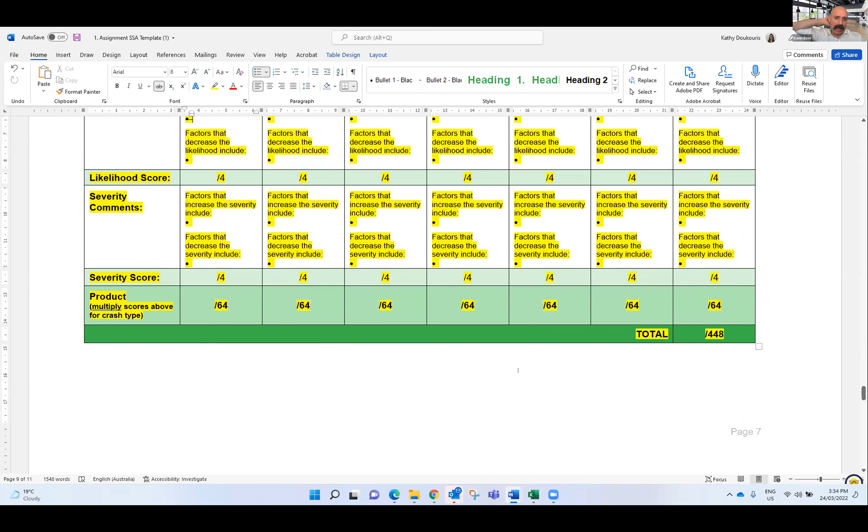Then you're going to get to this second-to-last section, which are treatments to improve safe system alignment.

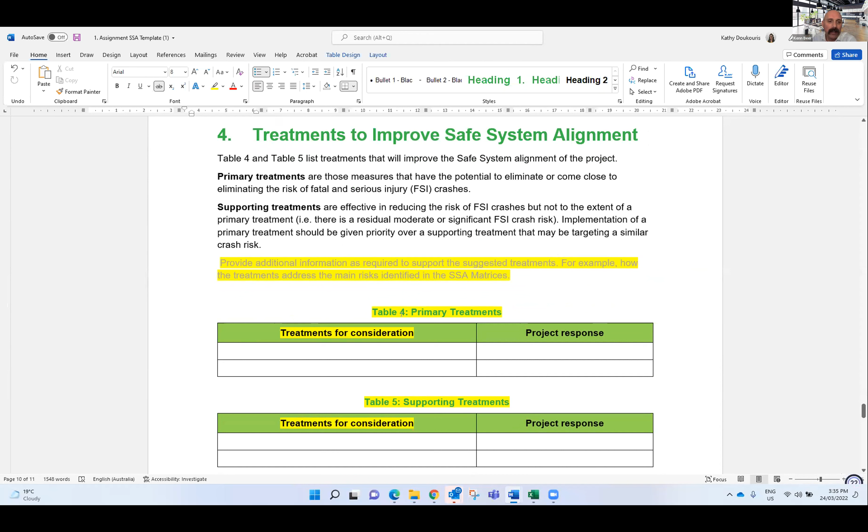You'll see that there's 2 tables there: a primary and supporting. Now, primary doesn't necessarily mean this is my number one recommendation. It's any treatments you're suggesting that categorize as primary based on the Australian Safe System Assessment Framework.

So you might have 5 primary treatments, or you might have no primary treatments. We'd like to see you have some primary treatments, but you might not. Or you might have no supporting, or all supporting, or just a few supporting.

So what you're doing is looking at that design and saying, I'm worried about pedestrians, or we're going, oh yeah. Then you might be looking at these supporting and primary treatments, and you might even get some inspiration as to what you could include.

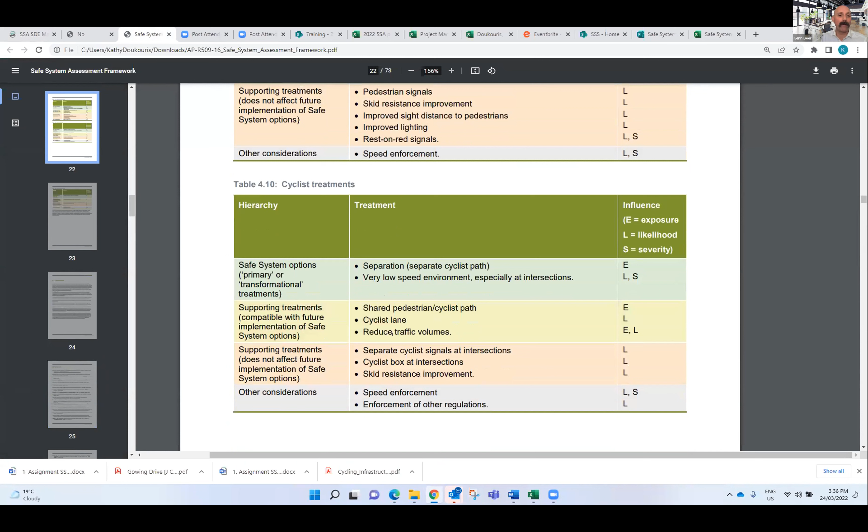Has it got cycling facilities? Okay, well, which cycling facilities, and are they categorized as primary or supporting? Or you might be making the judgment call yourself.

So you're putting all of that information in there, coming up with ideas. You might be saying, well, I suggest raising this bit, or adding curb here, or putting a sign here, and then you're deciding where you categorize those.

You don't do anything in the project response. That is the reminder to whoever receives this report, the project team - hey, we've made a recommendation here, or given you an idea. What are you going to do? Are you going to take that on, integrate it into the project, change the design? Are you going to say no, we can't do that for these reasons, or we're going to do something else? It's just there to remind them, do something with this report.

We're not going to get you to write up a flowing conclusion or anything like that, just to save time - in a real one, you would. And in terms of photos, we don't want lots of photos of the site and everything like that. We just want proof that you went to the site.

A selfie of you there in your high-vis vest on the site, or something like that, just to show us you went to the site. That's one of the requirements of the course - that you've gone to site, looked at the context, looked at it live, and know the benefit of seeing things in the real world compared to Street View and that sort of stuff.

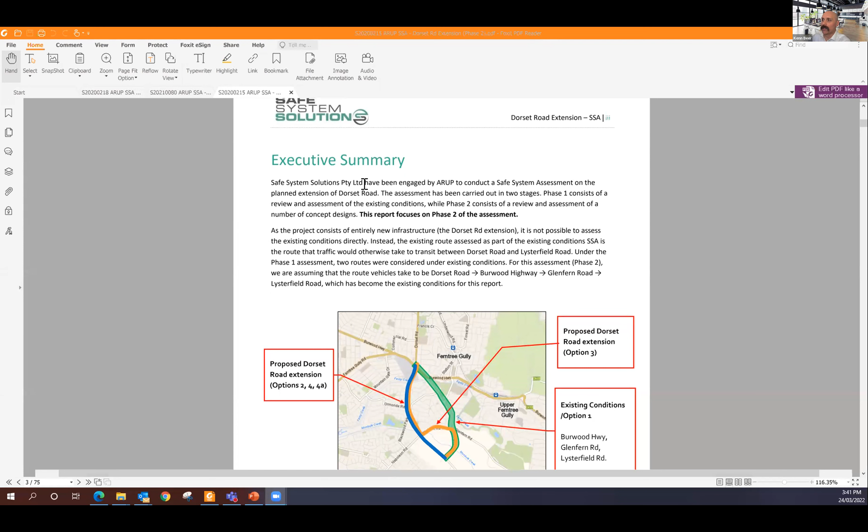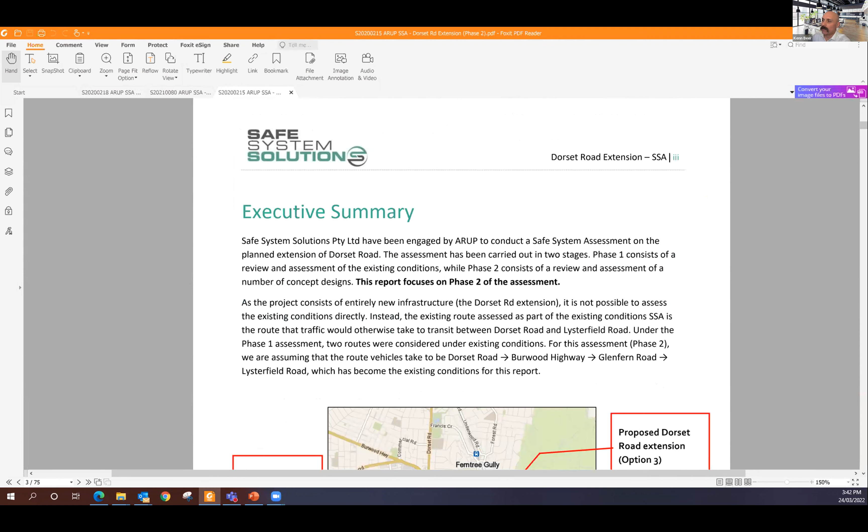Oh, what have you got there, Ken? Well, I just thought, because we have a couple of minutes here, that I would show a real safe system assessment. I'm not saying anybody would need to do it into this depth, but it probably helps people get an idea. So there's an exec summary showing the project, and within that a bit of summary of the different options available.

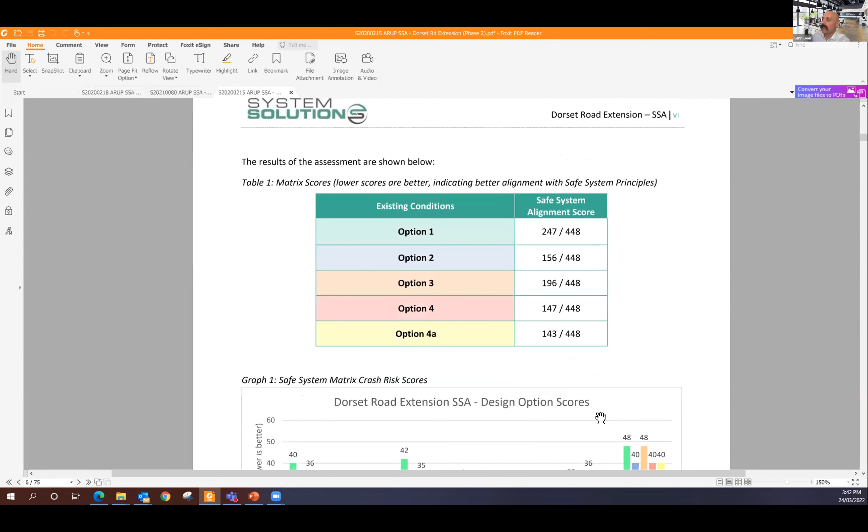You can see here that it's immediately got the options scored, quite a few options here. I actually think option 1 was existing and do nothing, so that's a bit misleading to call it an option. You can see there, we're seeing the scores play out - quite a story from that.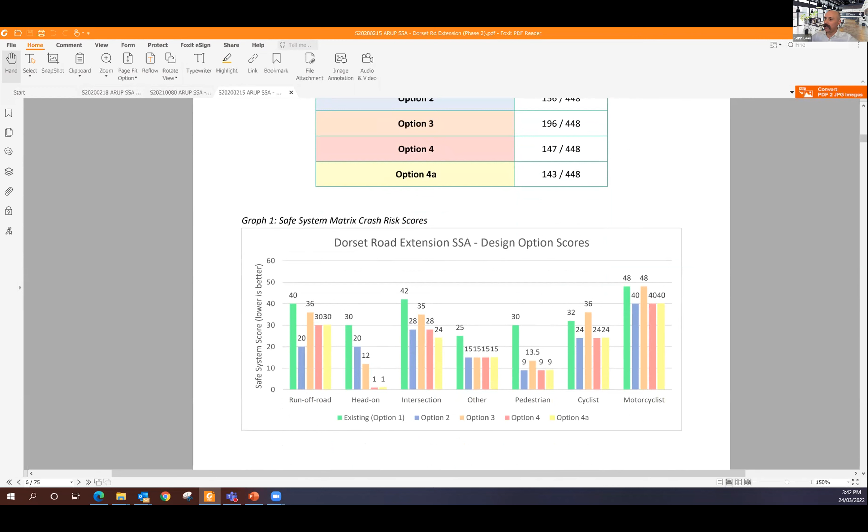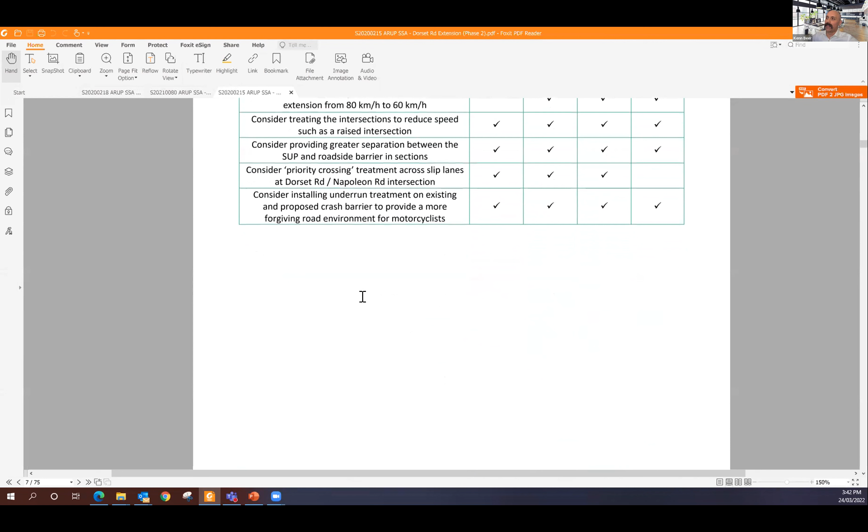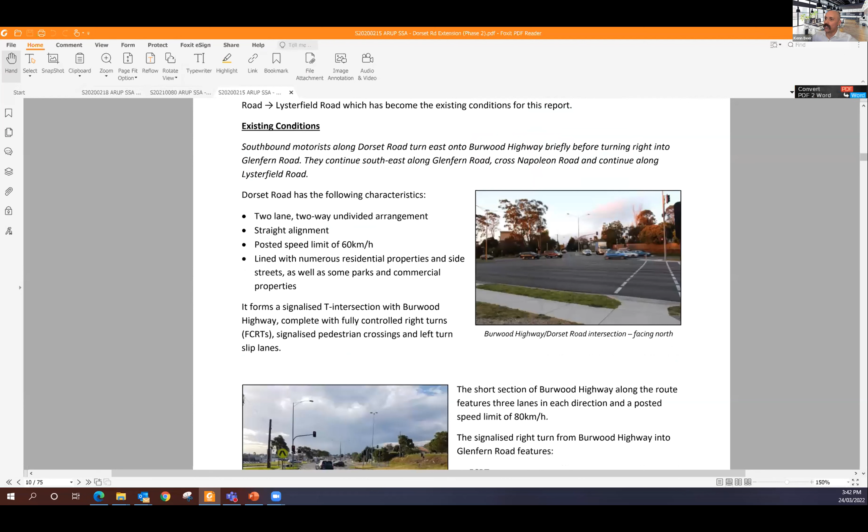Then some key findings, and key recommendations come in there, and you can see them allocating them out to different options. If I go through the table of contents, there's lots more information about the scope of the project, really getting into some detail there, because it's really trying to understand what the scope of the project is.

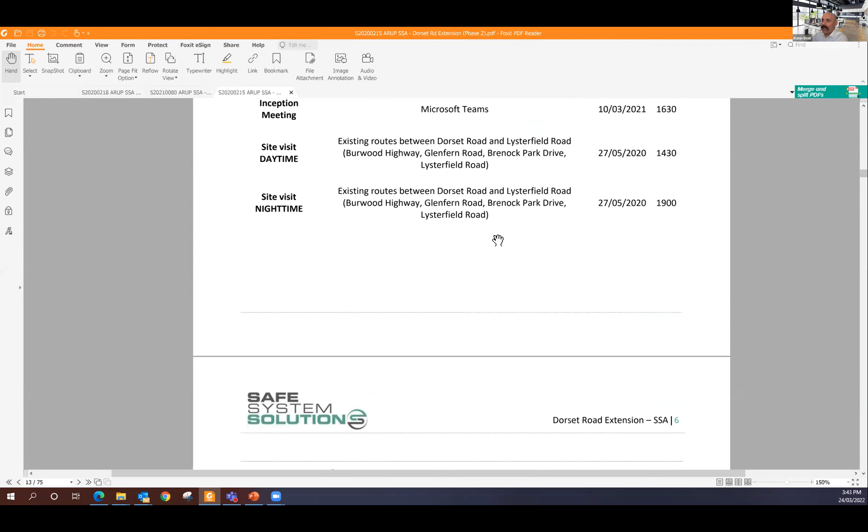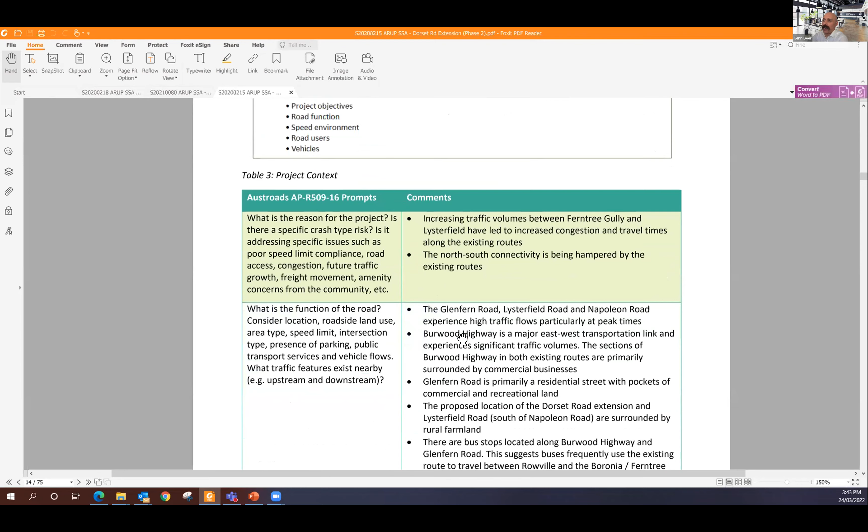Talking about the assessment itself, what was done, and the team. You can see quite a big team in this one, so lots of people decided to jump on board that one. When they went out to site, what meetings and the like that they had. The context - now they look familiar, don't they? Prompt questions and answers, so that ensures that context is captured nicely.

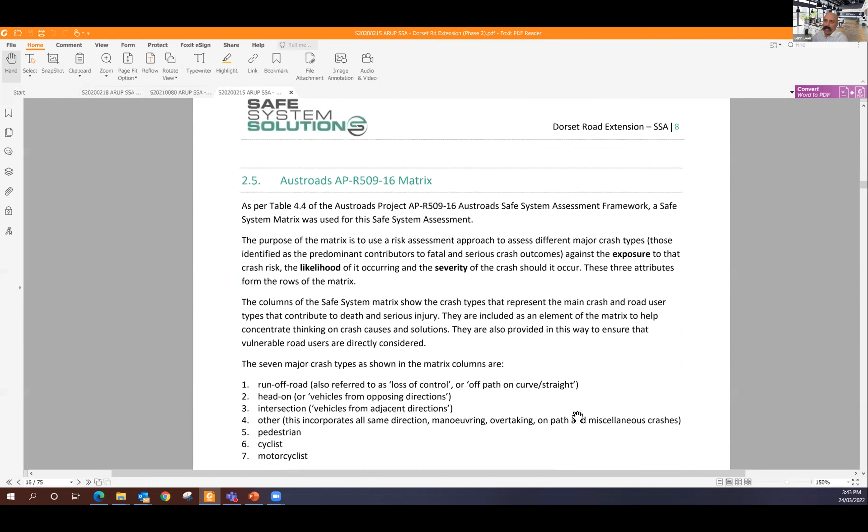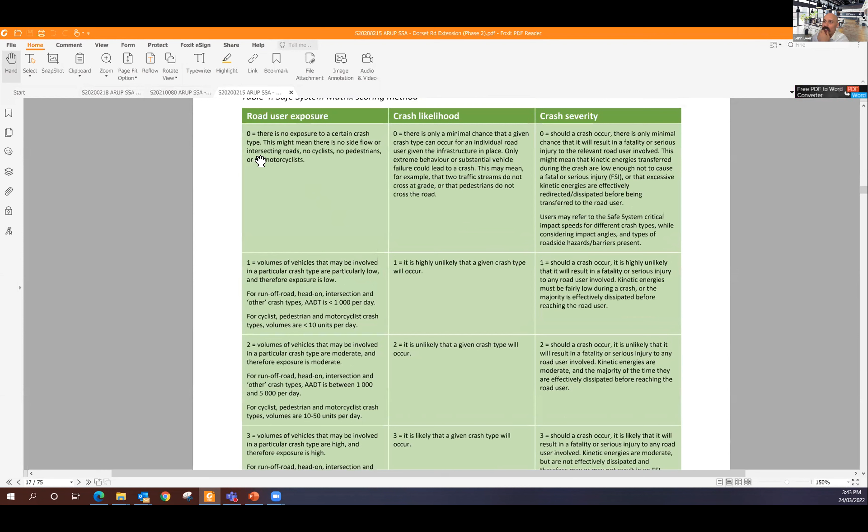This stuff is straight out of any of the templates and just talks about well, what is this assessment? How does it happen? Because people who are not familiar with it like to understand a bit about it. Here's the scoring sheet, so they can reference back to that. And then we're into the matrices.

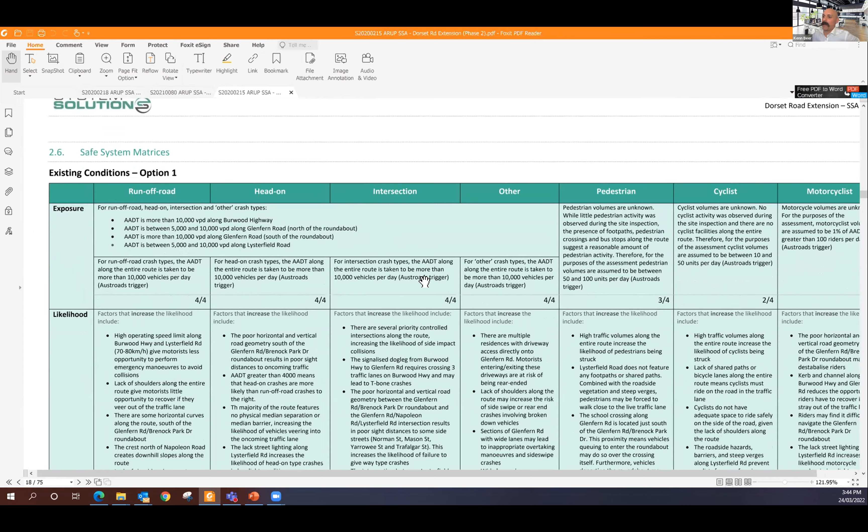And then into severity, and there's a bit of severity there, and a good bit of detail in the scores. That's the existing conditions. And then we'll see this repeated, but modified for each of these options. You can see a bit of modification and changing and updating and getting to some nice analysis. Those come in nicely sort of presented by this team in terms of different colors.

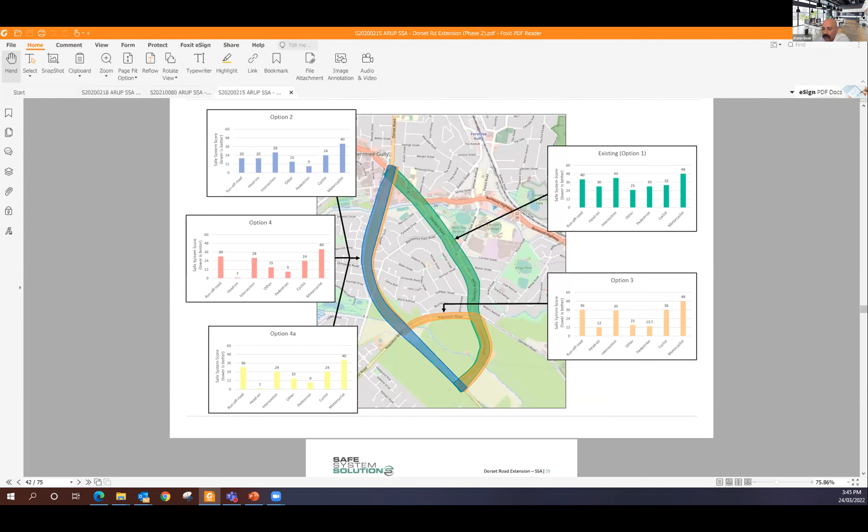So you can sort of refer to the red chart or the yellow matrix or the like. Then a nice bit of a summary there, mapped out nicely as well. That helps for consumability, for whoever's reading these outputs to understand that. Some summarizing of scores, and there'll be some recommendations, hopefully.

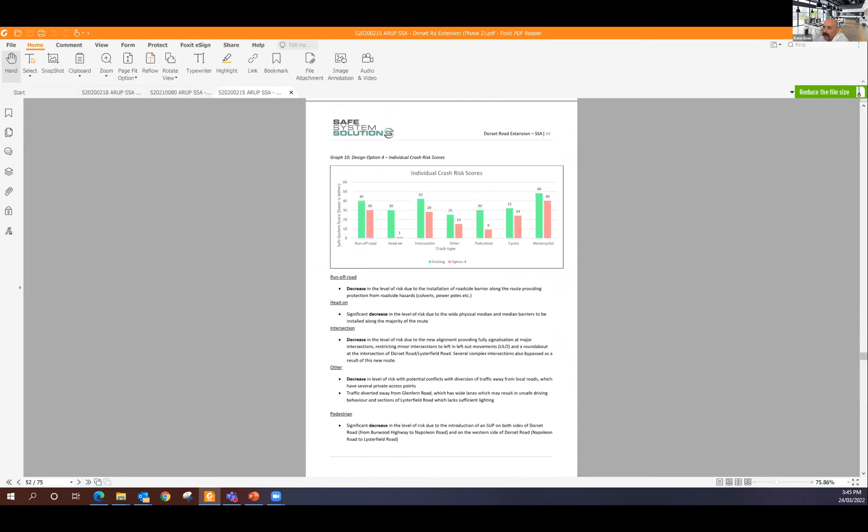Here's some information on the other options, and they may have generated ideas. Then the recommendations, or ideas for consideration - the table's titled ideas for considerations, which I like referring to them as, because I don't feel we're quite in a position to be making recommendations to a project team, even though we're really trying to understand their context. If you've worked on any major projects, with the amount of conflicting, challenging things you're trying to work with, you're sort of saying, here's some ideas to consider.

I like to try and be friendly about it, but others like to be a bit more big stick about it, saying you really should be doing this. You'll see recommendations saying this refers to design option 2, 3, 4, and 4A, or this one only for design option 2. Consider providing physical separation between the lanes and the median, or whatever it is.

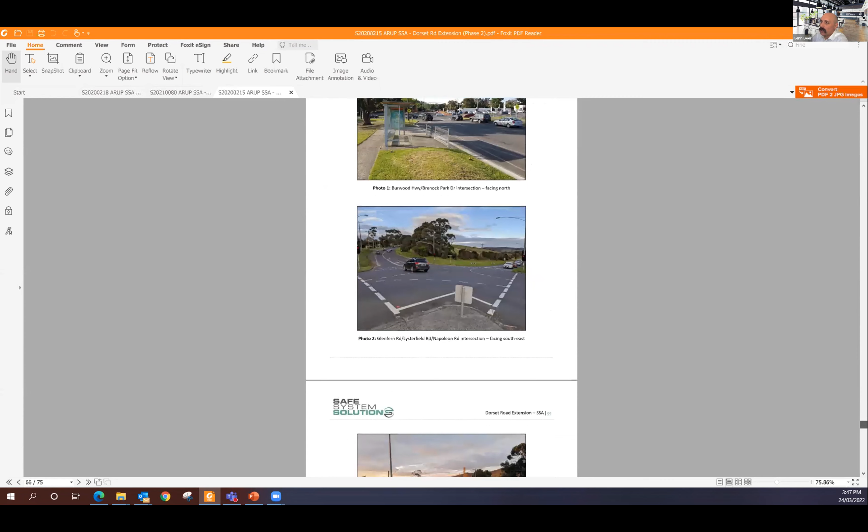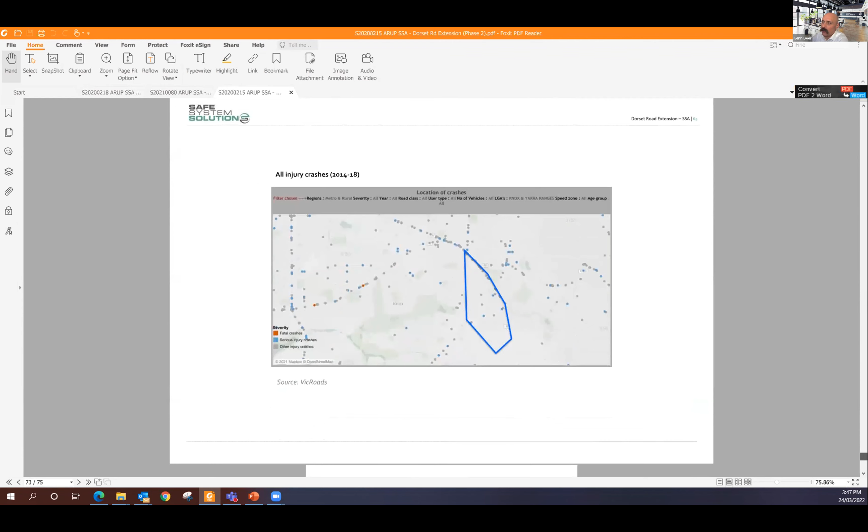So those are the recommendations, categorized as supporting, other, and a bit of conclusion, with photos from the site visits. That'll probably be it. We're not driven by crash history, but sometimes people like to look at what's going on in the area - it's up to you whether you use that. It just might help contextualize things, along with a land use map.

You can see it's quite a comprehensive one. These are $75 million, $100 million infrastructure projects, so they get a fair working over from a safe system assessment team, which is pretty exciting considering that.

People might say, well, we do road safety audits, but this doesn't just - this starts to quantify and says that one's better than this one, and these things are different, and that thing you're doing is really good. You don't get that in a road safety audit, it's just, we're worried about this and that. So some pretty good advantages.

But that's a full massive exercise. What we want you to do is just prove to us you understand those key bits. You can be more succinct in your matrix than that was - just dot point, you don't need to write it out in sentences. Just dot point your ideas and factors and the like.

Questions? There was a question about rapid safe system assessments - is the assessment in the road safety audit typically a rapid safe system assessment? No, it is a different exercise altogether. A road safety audit and a safe system assessment are different. They start, they will look at similar features sometimes and bits overlap, but no, completely different exercises, presented in different ways.